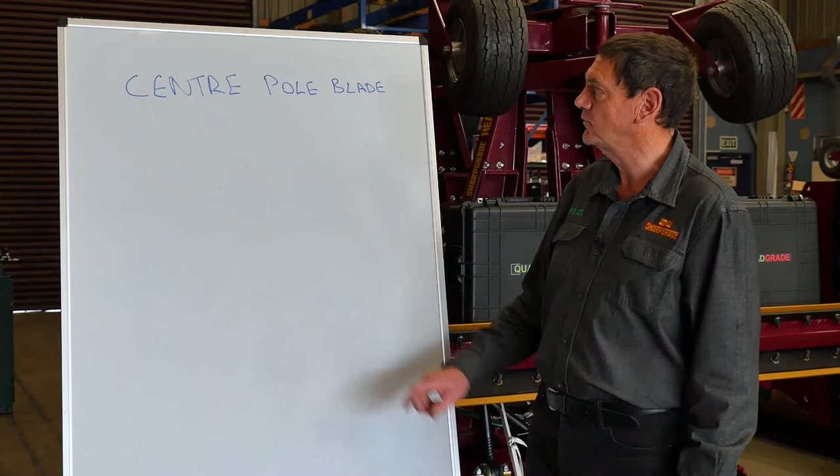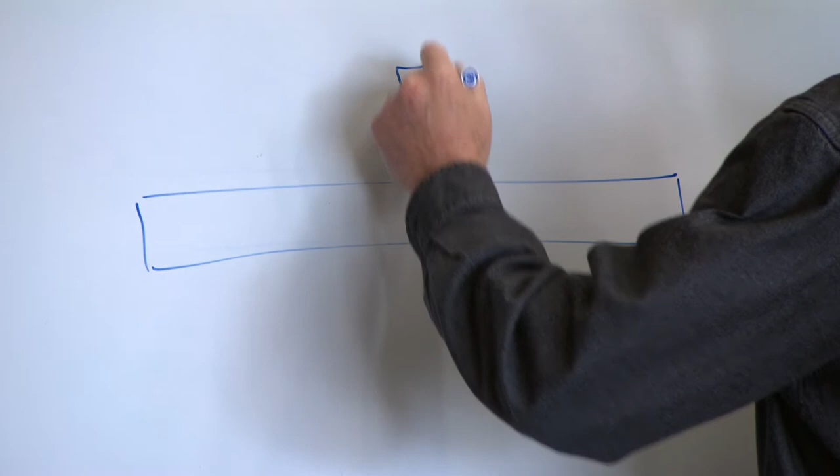Today we're going to talk about centre pole blades and why we don't use them. So, what is a centre pole? Well, if you have a blade with a centre pivot, you have to run a centre pole if you're sensing, because it's over the top of the pivot, which is the most accurate position for that.

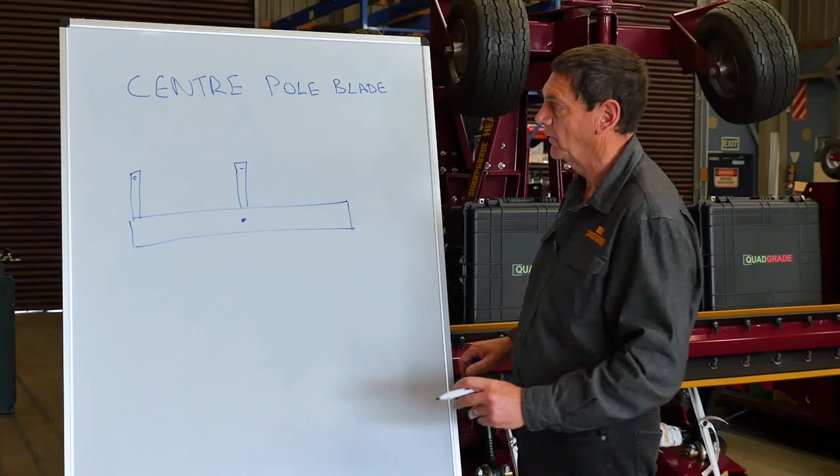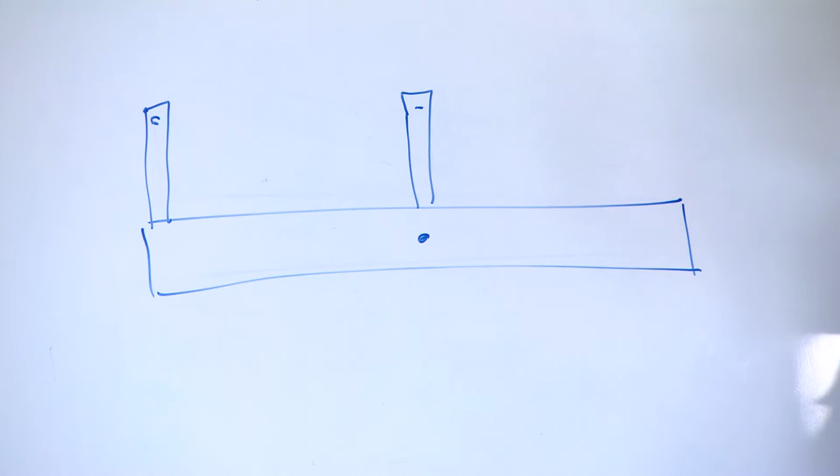But unfortunately, it's the worst possible position for this side of the blade, and we'll get to that. With a centre pivot, one controls your elevation and one controls your crossfall. So this one is controlling your crossfall, this one is controlling your elevation. What happens? Well, we want to be controlling within 1/8 of an inch, which is 0.125.

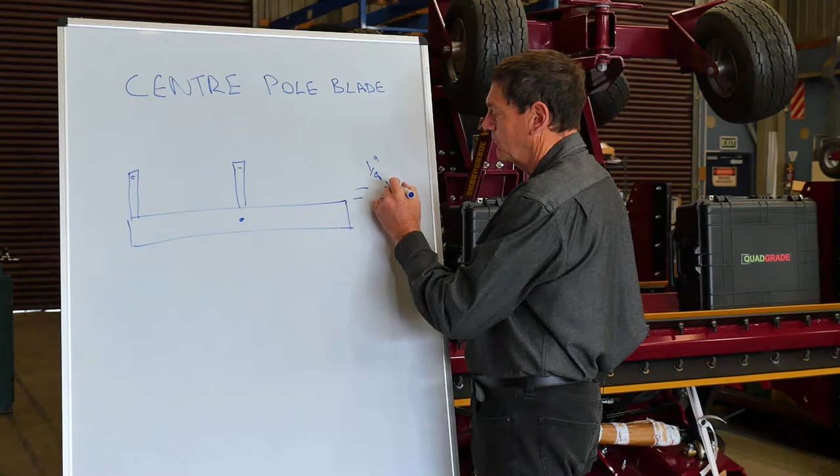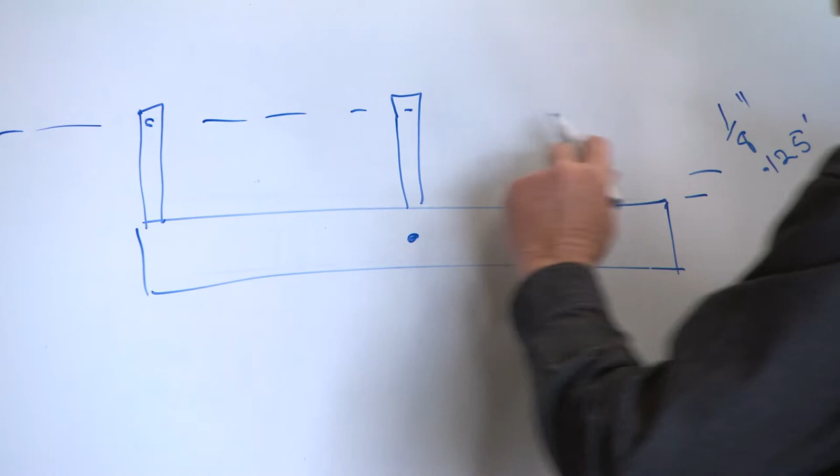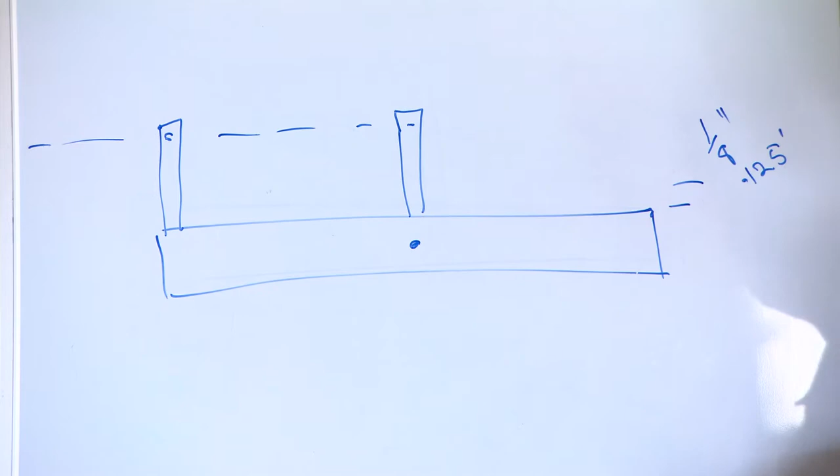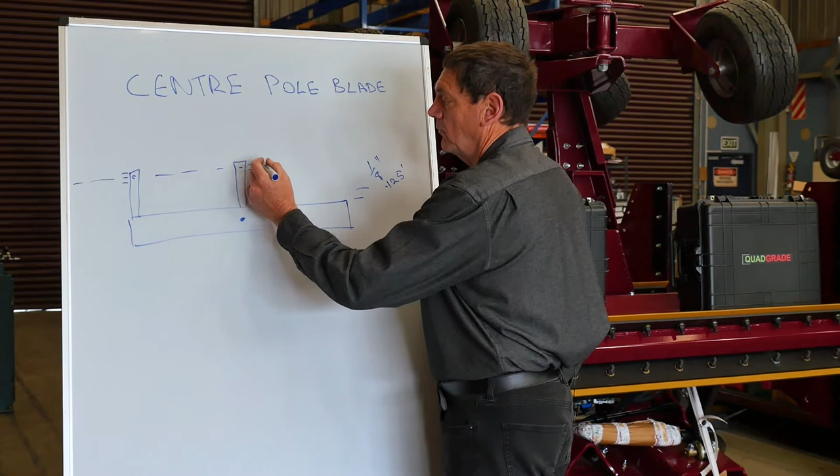Let's assume we're running a 2D laser. We're running our laser beam through here, and these are all reading on 0, and that's all fine. But as we start grading, we always have a tolerance on our sensors. Doesn't matter what it is, there's always a tolerance because you can never have it perfect. Normally that is plus or minus 1/8 of an inch. So here we have 0.125 inches, and here 0.125 inch.

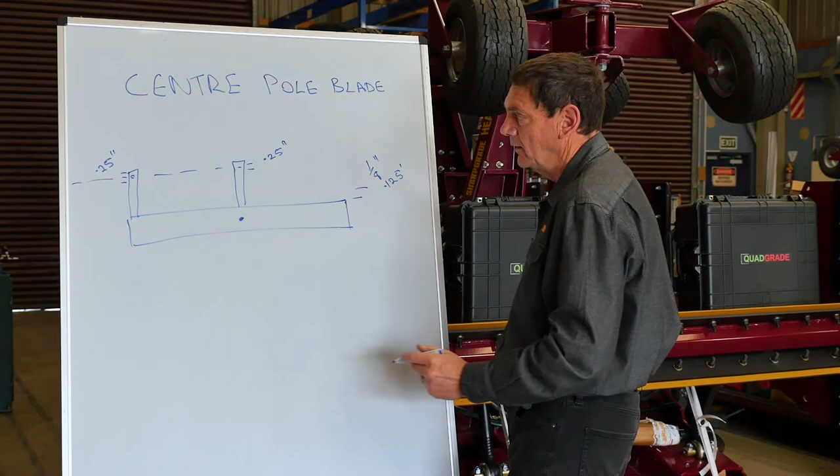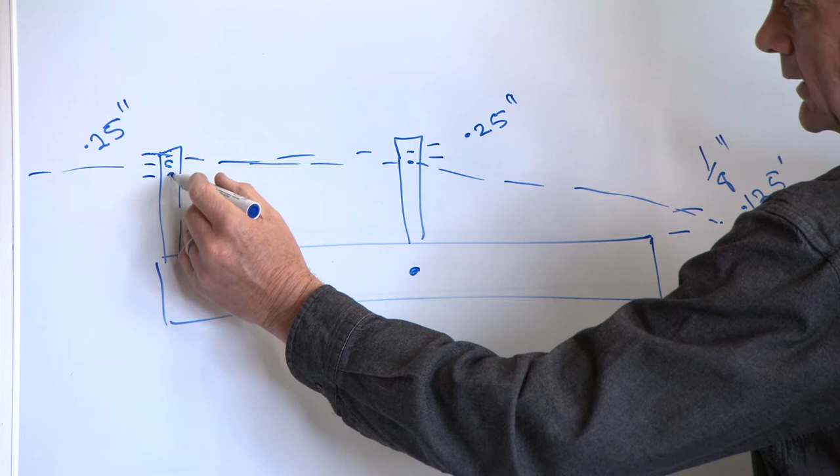Now, what happens is we can be at the top end, which is 0.25, or we can be at the bottom end of this one, so this comes through here, or it can come through here. So we can have 1/2 an inch of deviation on this side of the blade and still read within tolerance on each other side.

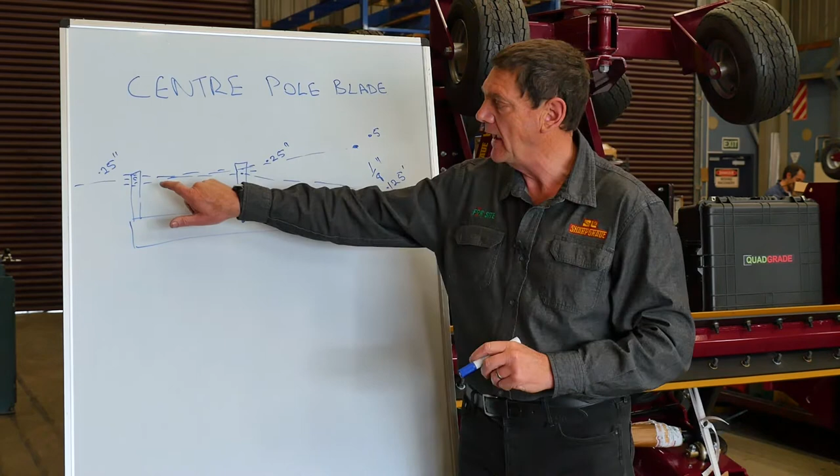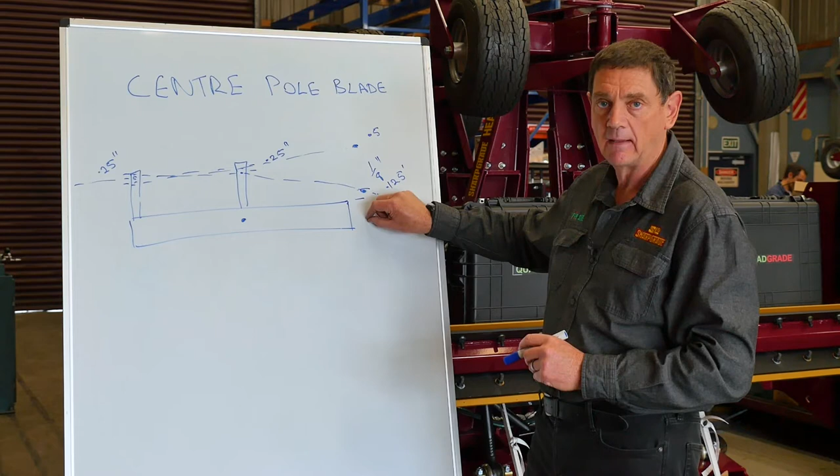So a centre pole blade is actually a best guess blade. There's no accuracy in it at all, because this side is a combination of this and this. And we've talked earlier about how just with standard manufacturing tolerances we can have 1/2 an inch of movement here. You then double that with the accuracy in your sensors and their tolerances. So you can have 1/2 an inch here and 1/2 an inch here. This point of the blade can be up to 1 inch out and still read.

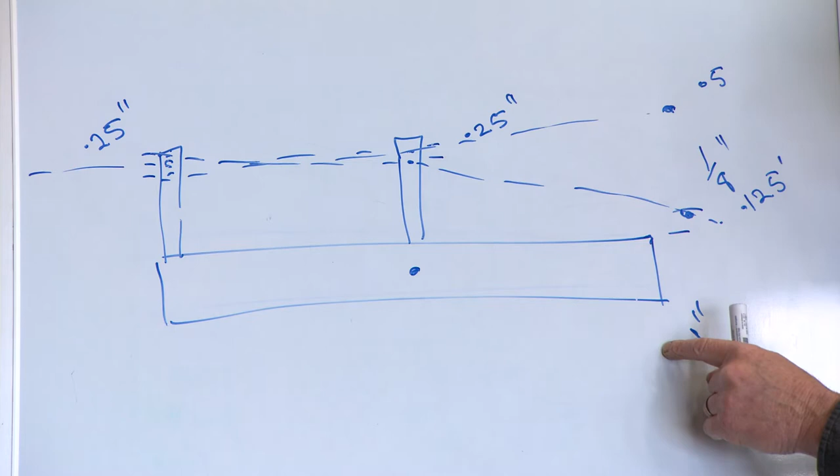Now, there is no way that a centre pole blade can grade with the accuracy that most people claim of within 1/8 of an inch. It looks like it is, but it's actually not, because of the tolerances inside your receivers or your sensors. So next time you see a centre pole blade, think about the accuracy of this point here and whether it's actually true or not, because physically it cannot be true. It can be reading as if it is, but in actual fact it can be anywhere.

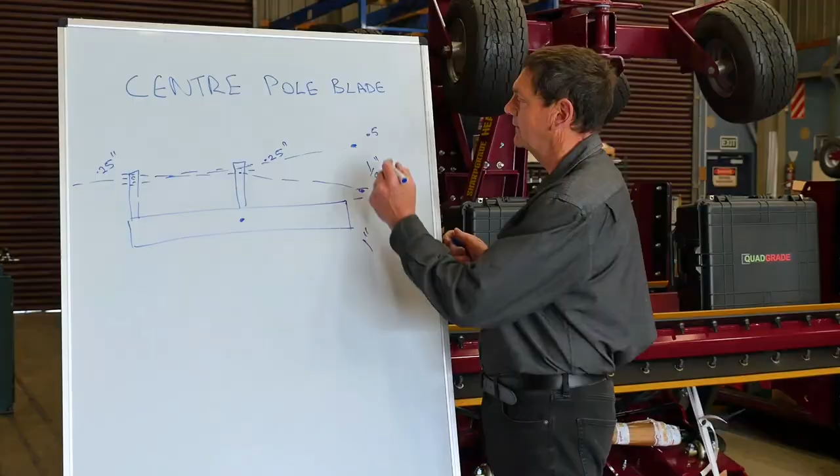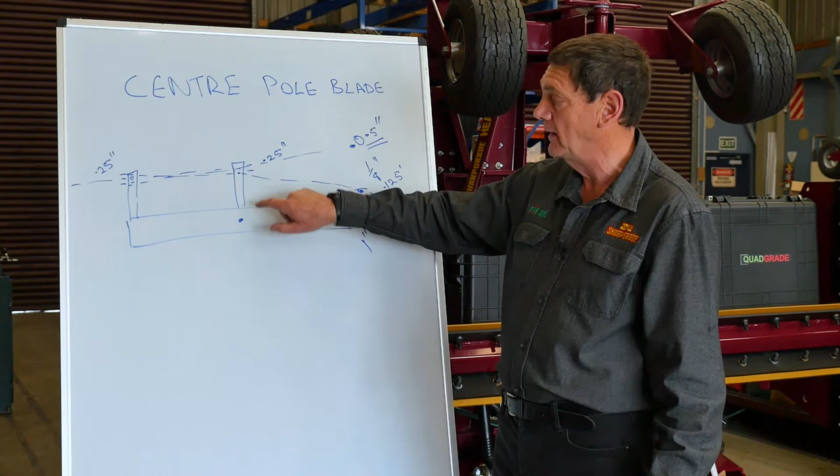So anyone that says they're grading within 1/8 of an inch with a centre pole blade is stretching the truth, because this here is actually what they can be grading to. I hope that portrays the problems with a centre pole blade combined with a centre pivot. It's totally the worst possible combination you can ever have for controlling a blade.

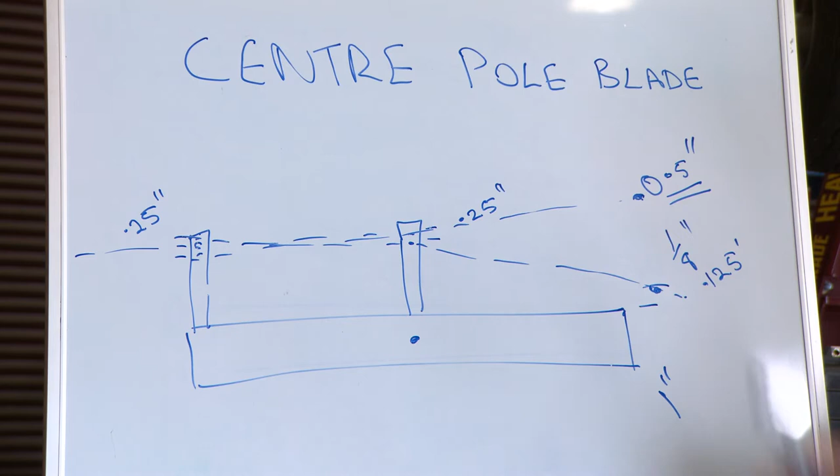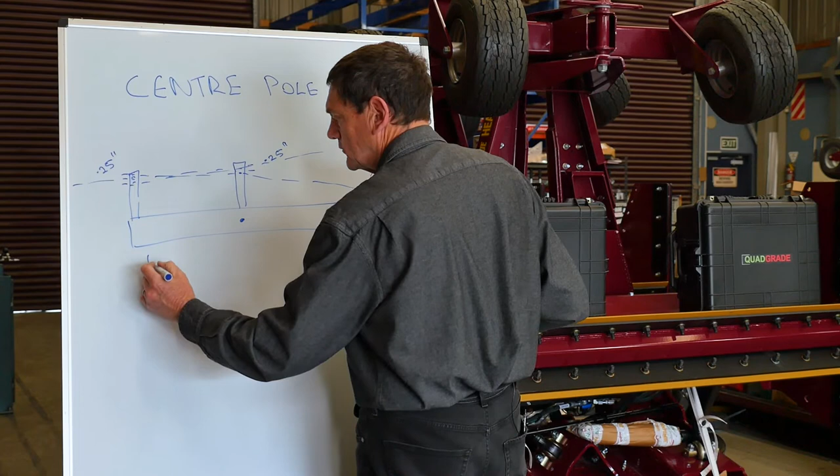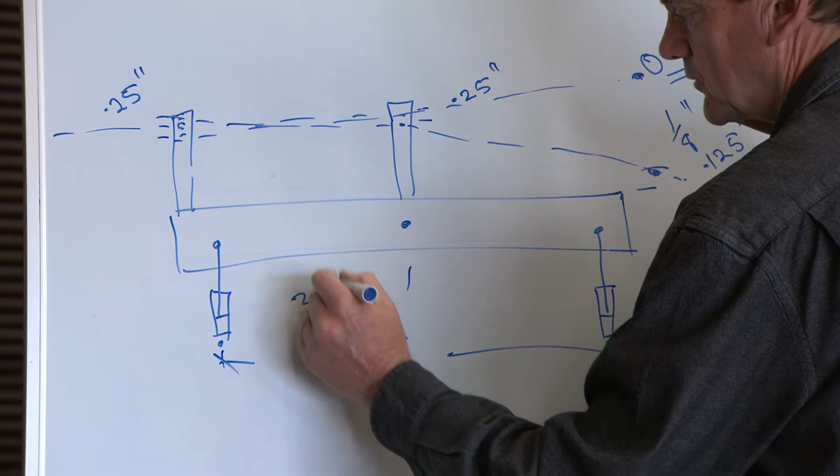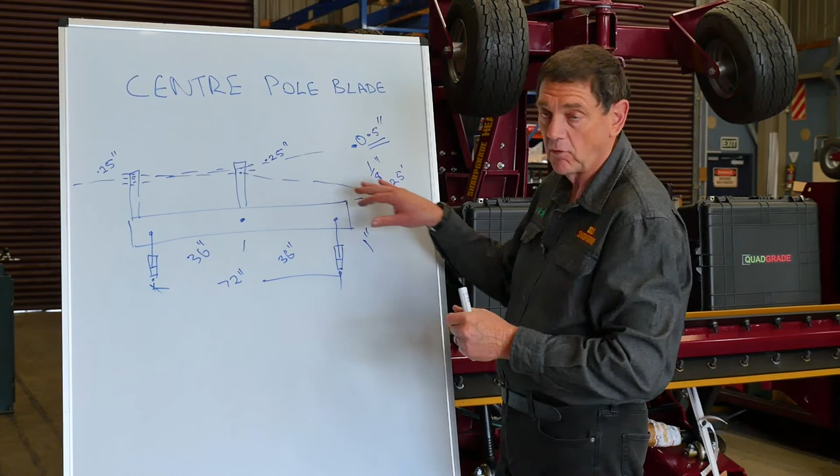Let's compare that to a Quadgrade linkage, and I'll draw it on the other side here. With our Quadgrade linkages on a 96-inch blade, we'd be running these at 72 inches, which is 36 inches there, 36 inches there. We run 0 clearance sphericals because we don't have any manufacturing tolerances to align, so we can run these at 0.

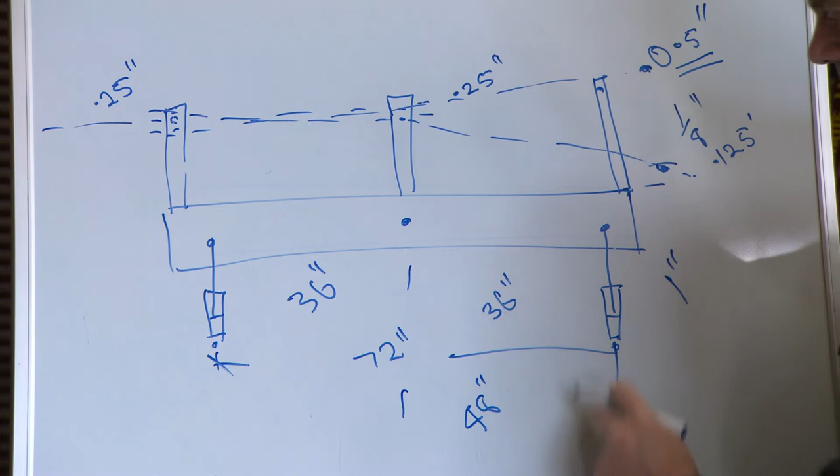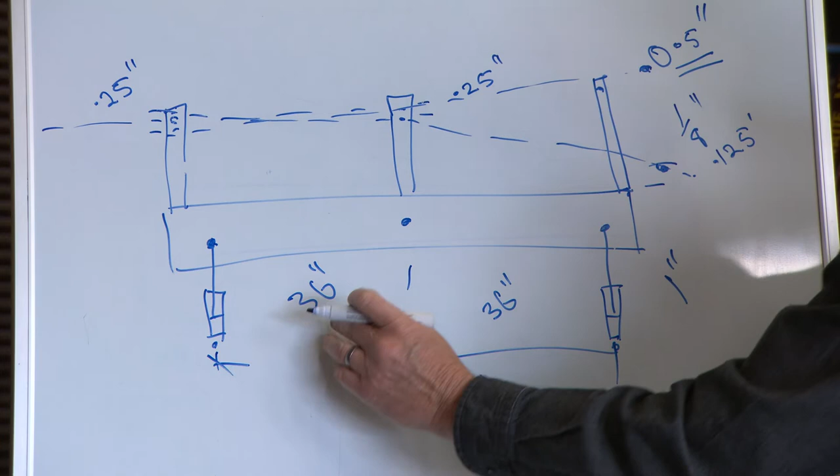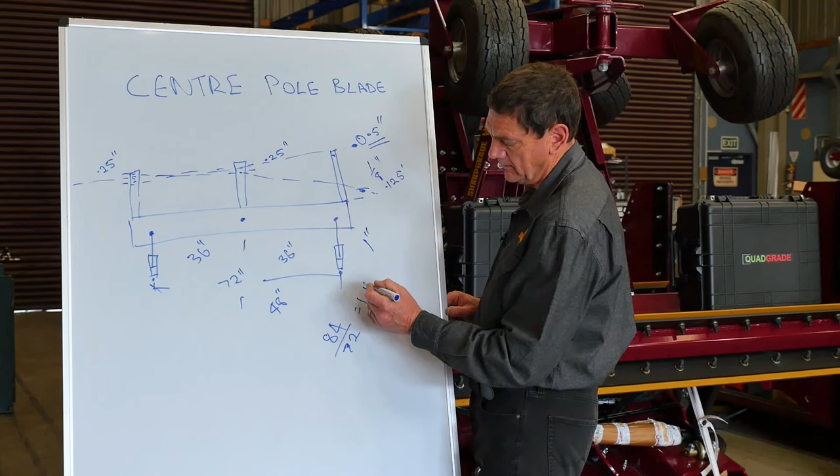And we have our sensors at both corners. So our sensors are at 96 inches, so that's 48, and our cylinder is at 36 inches, but it's actually off this point here. So it's 36 plus 48, which is 84, over 72, which is 1.16, let's say 1.2.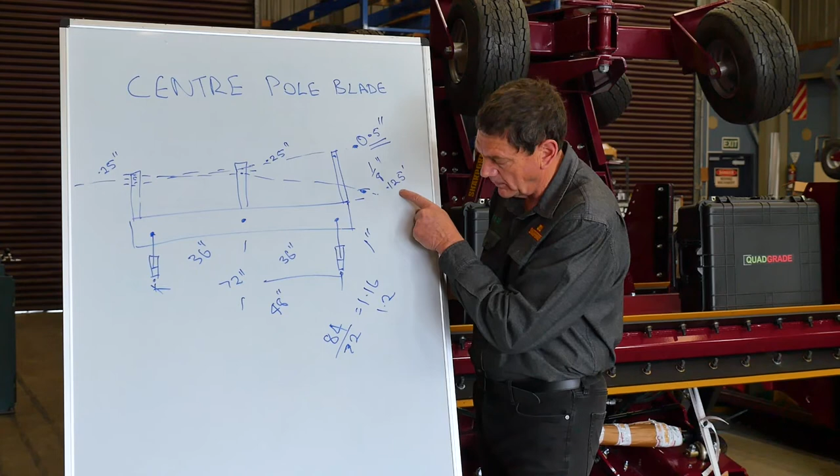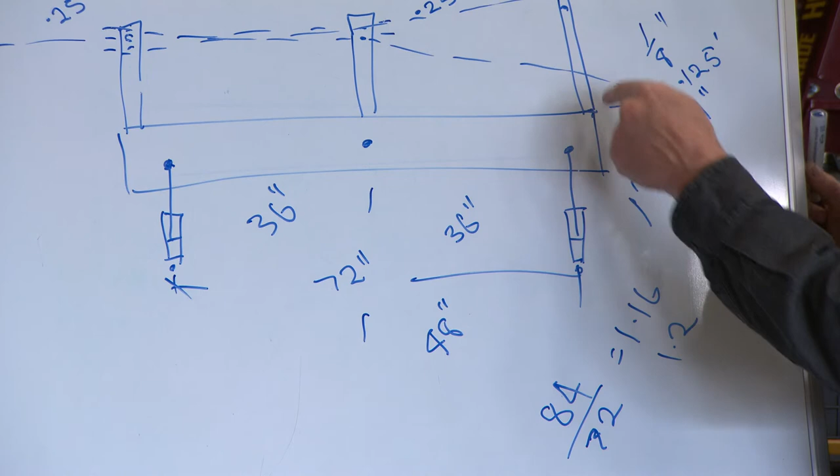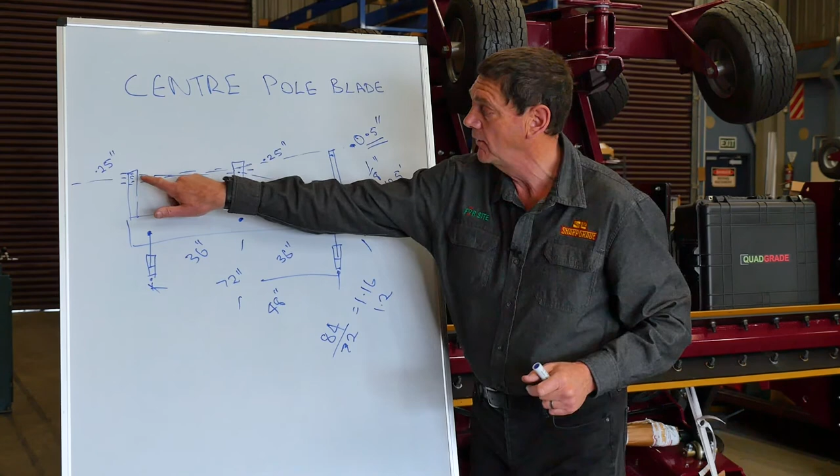So if we want to grade within 0.125, we have to shift our cylinder 0.125 inches to get 0.125, and because the cylinder is virtually under the sensor, there is no movement, so our accuracy is multiplied several times over. So you can see why a Quadrod linkage with the cylinders mounted to the outside with no cross coupling is the best system. There is nothing better for controlling a blade.

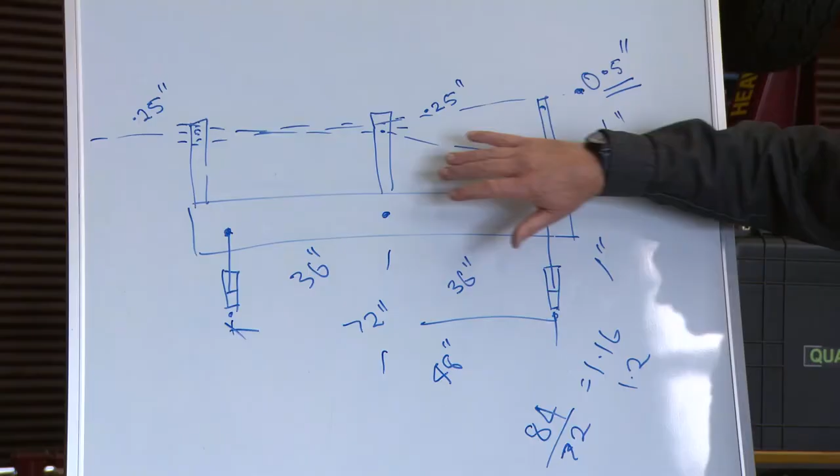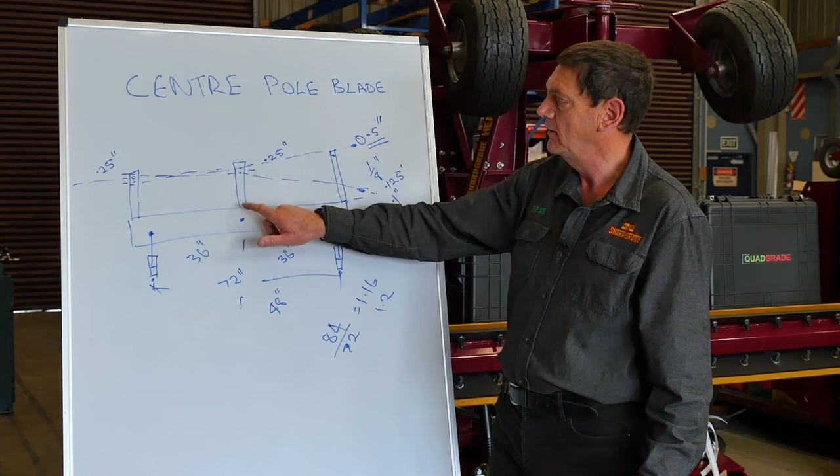And a centre pole and a centre pivot is the utter worst. You cannot get anything worse than that combination. So next time you're looking at a grading box and you see anything with a centre pivot, you know that's a best guess system. They don't actually know what's going on because of the inaccuracies in the sensor, and the tolerances you set means you're guessing where you are.

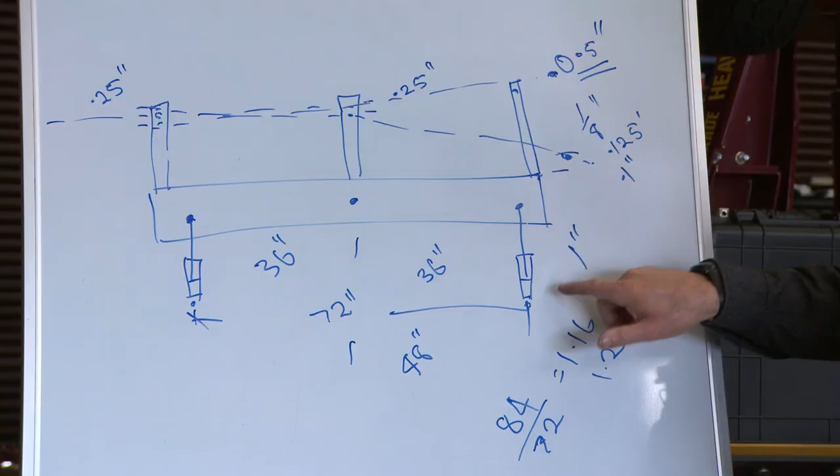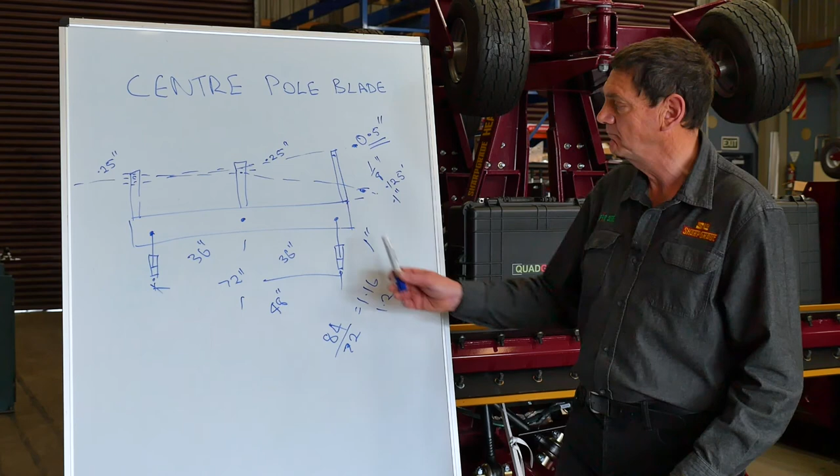Whereas a SharpGrade with Quadrod linkages, the cylinder is right out there, right below the sensor, so basically it holds it super tight and super accurate. So I hope that's clarified why a Quadrod linkage is so much better than a centre pivot and a centre pole.